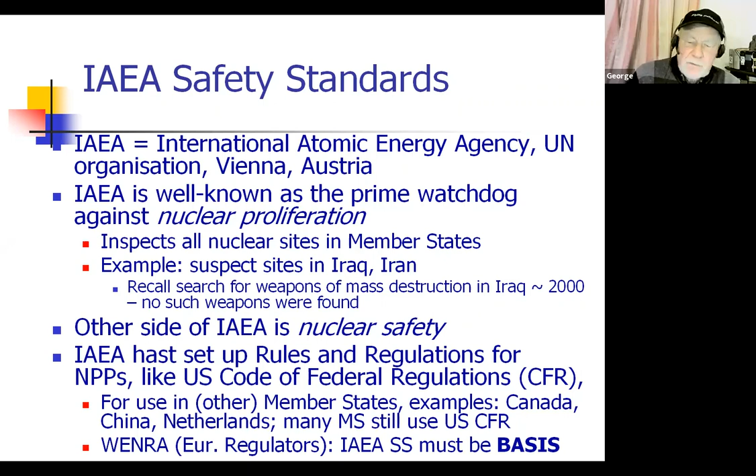I'll talk a bit on the structure of the rules and regulations. They are comparable to the US regulations, in that they have first general safety requirements, with 7 parts. I'll just mention a few of them. Part 1 is government organization - that means, notably for countries embarking on nuclear power, it is relevant for them to know what type of organization they need for a proper structure to build nuclear power plants.

Part 4 is the safety assessment - how do you assess the safety of the proposal by the applicant? And Part 7, also important, is the response to emergencies. So those are the general safety requirements.

Then there is a number of specific safety requirements, and there I would focus on two very important ones. SSR-2/1 is the design of nuclear power plants, and SSR-2/2 is the operation of nuclear power plants. So the design of NPPs can be a little bit compared to 10 CFR 50, Appendix A, which has the US design features, design requirements for NPPs.

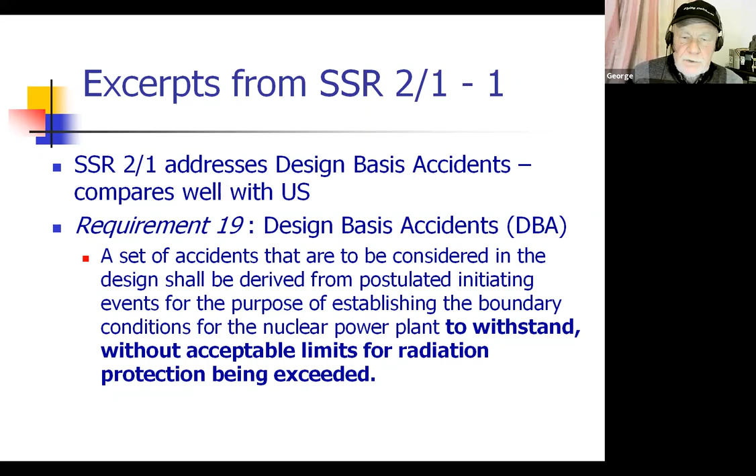Then that is different for the design extension conditions. The agency there has added on the design basis event. They have defined beyond design basis events, which they call design extension conditions. And there, that is in requirement 20, then they say that you should consider a number of conditions beyond the design basis with the purpose to improve further the safety of nuclear power plants. And in doing so, try to enhance the plant's capability to withstand without unacceptable radiological consequences, accidents that are more severe than design basis accidents.

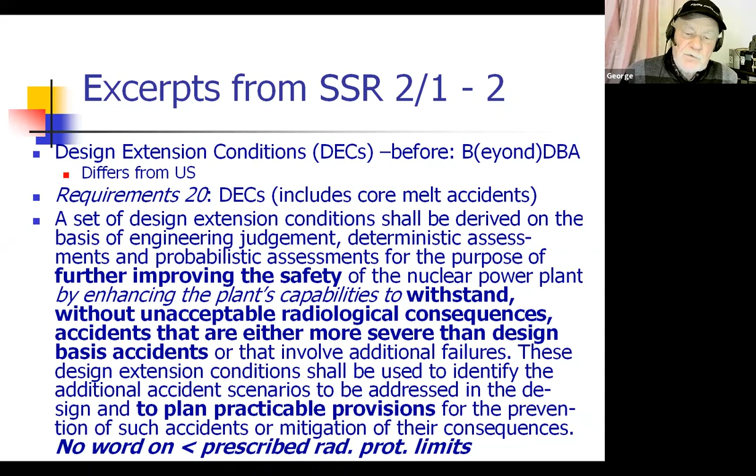And you must use these considerations to plan practicable provisions for the prevention of such accidents and mitigation of their consequences. So there is no word that you must stay below certain radiation protection limits. You see here, you must make practical provisions for the prevention of such accidents. In practice, the agency requires the new nuclear power plants to make strong use of this requirement 20 that they have, let us say, outside radiation practically eliminated. That is the goal. So we practically will not see any dangerous consequence outside the nuclear power plants.

So these design extension conditions must be considered in the design. It is not a voluntary effort. You must do so. In the US, you have this 10 CFR 52 that also gives you how to license a new power plant. And there is a few lines also that you should describe the matters which are there to prevent and mitigate severe accidents. But I found only these 2 lines, not anything more.

And nothing is said about that you should try to stay below or not have unacceptable radiation limits outside. The applicable regulation here is more soft than for the design basis events. For instance, for the design basis events, we have a safety classification, which is very strict. Because if you define a certain system to be safety class 1, 2, or 3, or as it is today in the US, safety related, then that gives additional high-level requirements for the manufacturing of the components of that system.

For the design extension condition, if you have equipment used to prevent or mitigate those events, then they lower that safety classification, and they are satisfied with industrial quality. You can say for the more probable accidents, they require a very high level of defense. And for the very low probability events, it is satisfactory if you have an industrial quality. It must still work, of course, but you don't need to spend a lot of money on high safety classes of the dedicated equipment. Also, there is no single failure required.

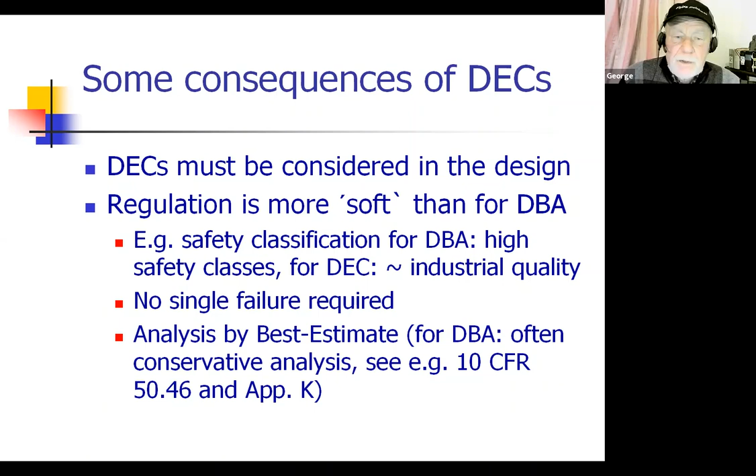The phenomena during a core melt, if you are not well known with them, I will list them briefly. First, we have extreme hydrogen generation by the water-zirconium reaction. I hope you at University of Wisconsin have success with your research on accident-tolerant fuel, because that would make this hydrogen generation more mild. The core will melt by its decay heat, resulting in an immense release of fission products to the containment.

That core may ultimately melt through the RPV lower head. If that occurs at high pressure, you are pushing extremely hot debris around in the containment, and that may give you pressure spikes known as direct containment heating, which may threaten containment integrity.

If after the melt-through of the RPV the corium is falling down into a water pool, you may have a steam explosion in the cavity, or in the pedestal for a BWR, and that may breach the cavity or breach the containment.

The molten core will also interact with the concrete, ablating it, and generating large masses of carbon monoxide and carbon dioxide, which results in pressure spikes in the containment. This is known as MCCI, the molten core concrete interaction.

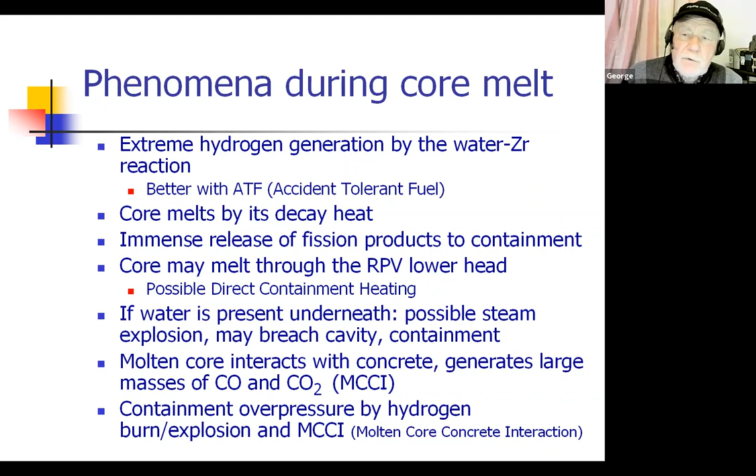Here I give you a short overview. Here you have the vessel with the core melting, and here it falls down into an eventual water pool, possibly generating a steam explosion. The hydrogen combustion puts a lot of pressure in the containment. We have direct containment heating, when the vessel contents are pushed into the containment atmosphere. So there is a lot of bad things that can happen.

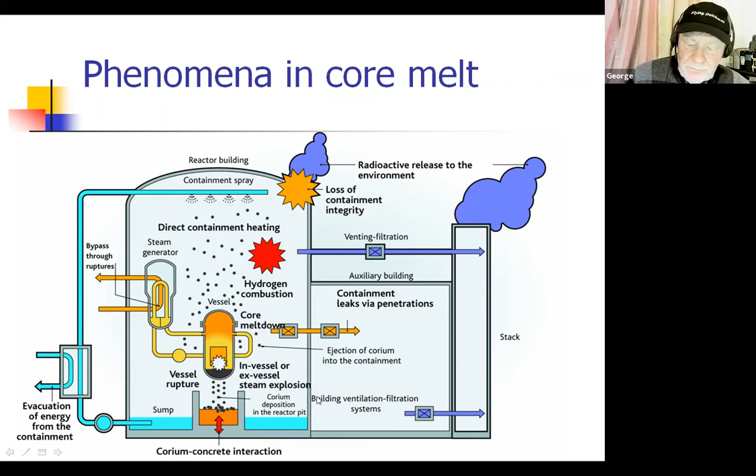Here you see a few details of those processes. Here is the steam explosion in the cavity of a French PWR, from a French monograph. The red sign is clear to me, but I must say I didn't notice what the yellow means - I guess it's related to the steam explosion. This steam explosion can destroy the cavity, and even more of the structure, and eventually the vessel may come down, or you may even overpressurize the containment itself.

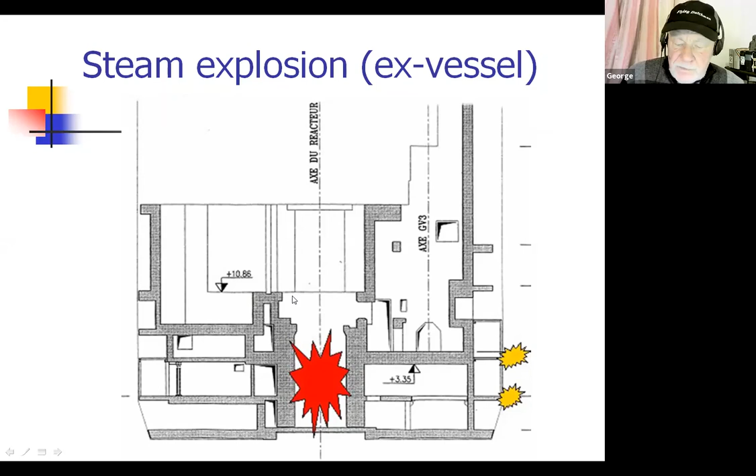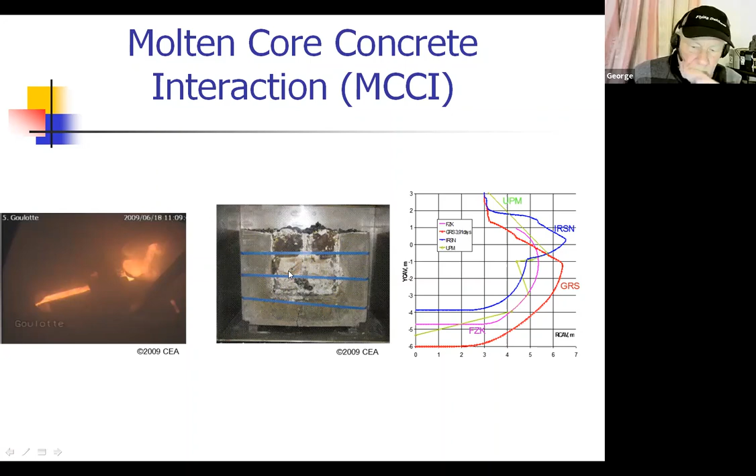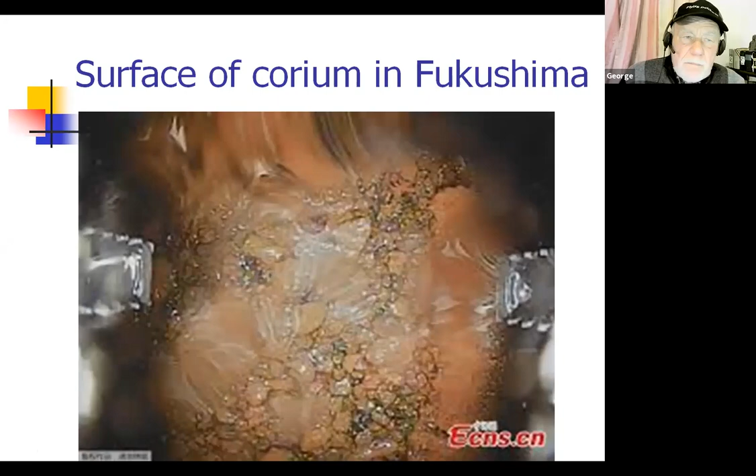The consequences of the design extension conditions - I will focus on what we did in Europe. The design extension conditions remain clearly beyond DBA. Nobody tried to have the design extension condition inside the design basis.

Some countries have established radioactive release limits - for instance Sweden and Finland - saying you may not release more than so much radiation in such a scenario. Personally, I would say it may not be feasible to have such strict rules, because severe accident calculation is a tricky business with large associated uncertainty. So if you do the calculation there will be a big margin, and it's difficult to demonstrate you stay below certain limits. But differently from the US, many countries here have required hardware features and hardware changes.

I'll give you some pictures in the next slides. First, there were filtered vented containments - that means if the containment is overpressurized, it's not just relieved to the atmosphere, it's relieved through a filter. There are also hydrogen recombiners installed.

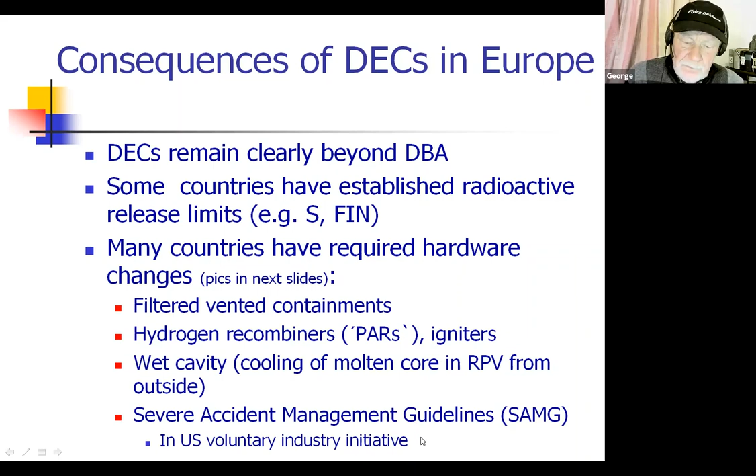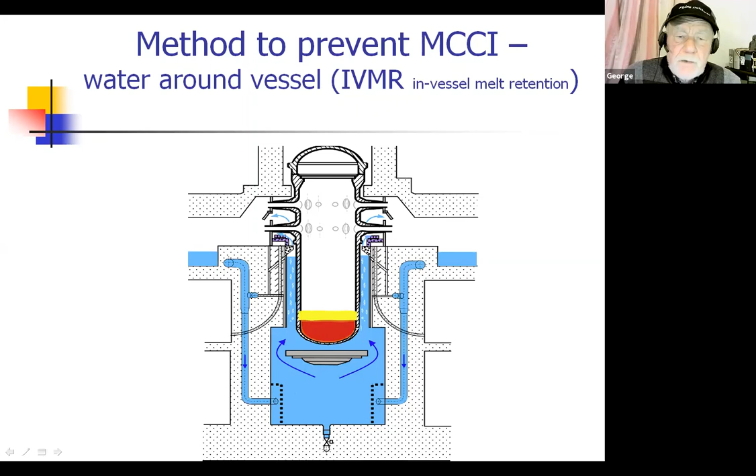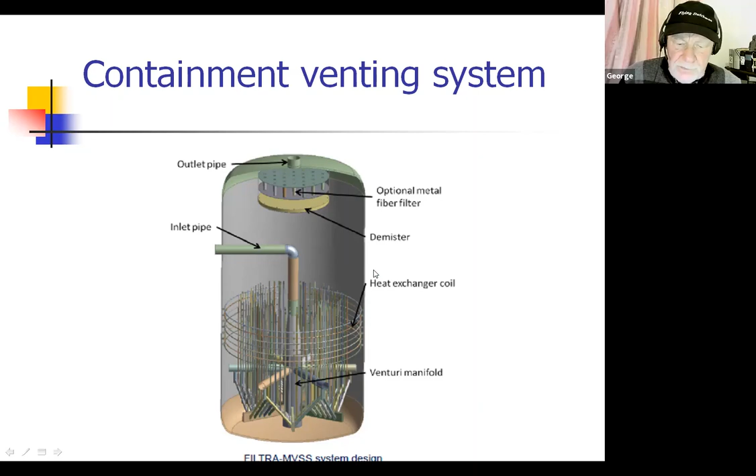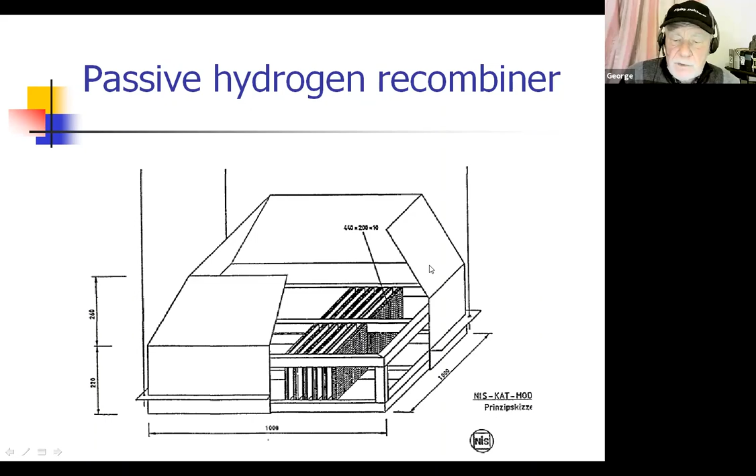The accident management, how does that look? You will recall there are probably 3 ranges of procedures. First, for normal incidents, the abnormal operating procedures, the AOPs. Then if we have safety injection or an emergency shutdown, we have emergency operating procedures after that. If we cannot save the core using these two sets of procedures, we understand we have a damaged core, and that brings us to the severe accident management guidelines.

Please note the difference: for the first 2 conditions, we have procedures, which means you must follow them verbatim. For the core damage accidents, we have guidance, and there is no need to follow them verbatim. The US completed this severe accident management guidance already in 1998. In the rest of the world, that started later, and unfortunately not all plants may have that yet. In 2011, Fukushima, for instance, did not have a complete set of operational SAMG available, which otherwise might have helped them quite a bit.

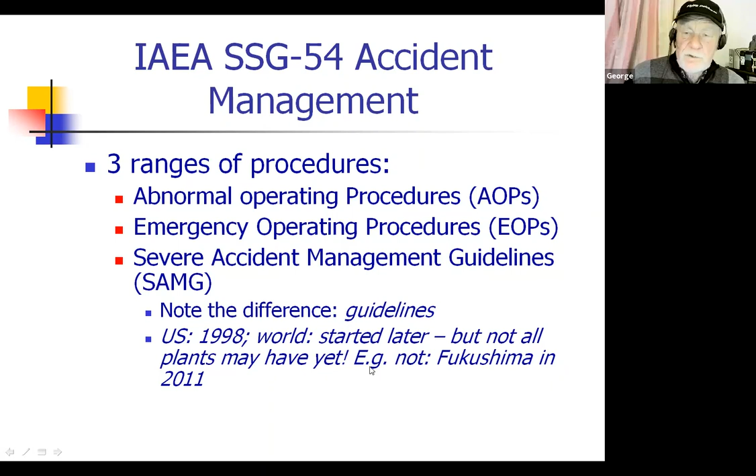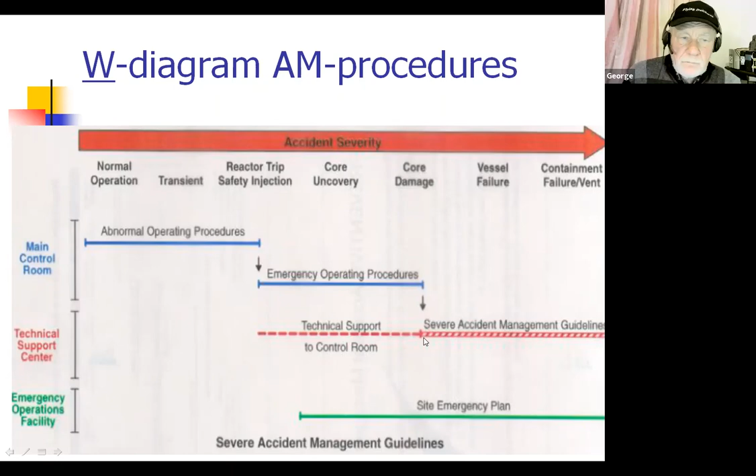Well, what about the lessons from Fukushima?

Here I borrow from a lecture by Yasunori Yamanaka from CRIEPI, which is something like EPRI in Japan. For accident management, he says the very first thing you must have is comprehensive data collection. Evaluation of data is essential.

I'll give you examples of how this can go wrong. There must be a smooth linking between the permanent equipment and the mobile equipment. Somewhere your permanent equipment will fail, otherwise you wouldn't be in that accident. You must hook on the mobile equipment, but you don't have much time to do that. Once the permanent equipment stops, you have not much time to switch on the mobile equipment. This happened in Fukushima, but unfortunately maybe in other plants as well - hooking on mobile equipment within a certain time must be exercised and trained, because a lot of things can go wrong.

I myself saw once an exercise in the Netherlands where they tried hooking on portable equipment, and I insisted that they should do the test. The people said, George, that is not needed, we know there's a big hose and it will connect there. But I insisted, and when they were unrolling the big hose, they found out the hose was one meter short. It didn't reach the proper interface equipment.

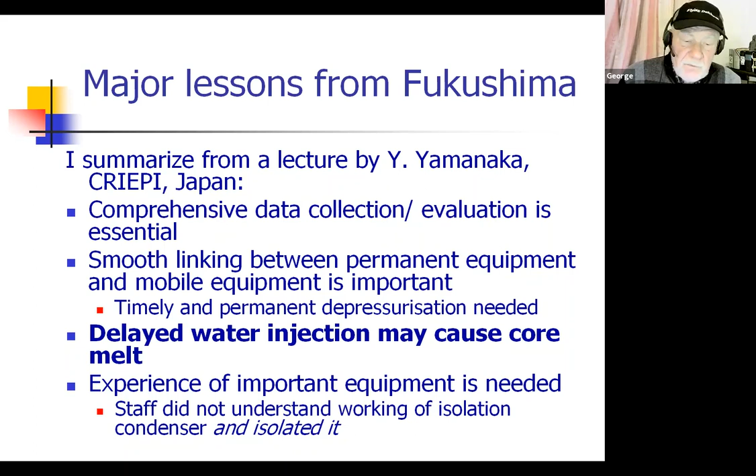Here you see the difference between actual and observed data - the observed water level in the reactor pressure vessel of Unit 1, where this is the top of active fuel and here below is the bottom of active fuel. This is what was seen in the control room. But when they finally analyzed the whole thing based on the data, the analysis gives somewhere in these two curves - meaning the measured data were totally and fully off from reality.

That is one of the important things in severe accident management guidance - you must have instruments that tell you the truth, or if they don't, that you know what the deviation is. Some SAMGs do tell the people that this or that instrument will give so many percent difference in reading, but a number of them only say you may see a different reading, don't trust it. That, of course, doesn't help the operator so much.

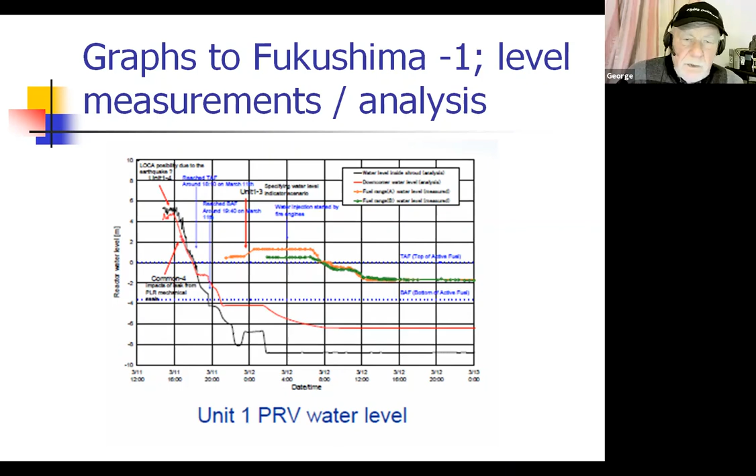Here is the most typical process in Unit 2, where they were injecting with the mobile pump, and by injecting water they ran above the pressure of the injection system. So injection was stopped, and when pressure went down again, it came up again, and injection resumed. A large amount of steam and hydrogen was generated, causing immense heat in the degraded core, and it is believed this enhanced the core melting - so the fuel melted as a consequence of water injection.

That is the thing I believe operators must know - the moment they understand the core is gone, they should have guidance on what to do: either put so much water that you immediately quench it, or don't put water in the core and wait until it melts through the bottom, then take your measures there. These are the things that must be evaluated by the technical support center and then lead to a conclusion.

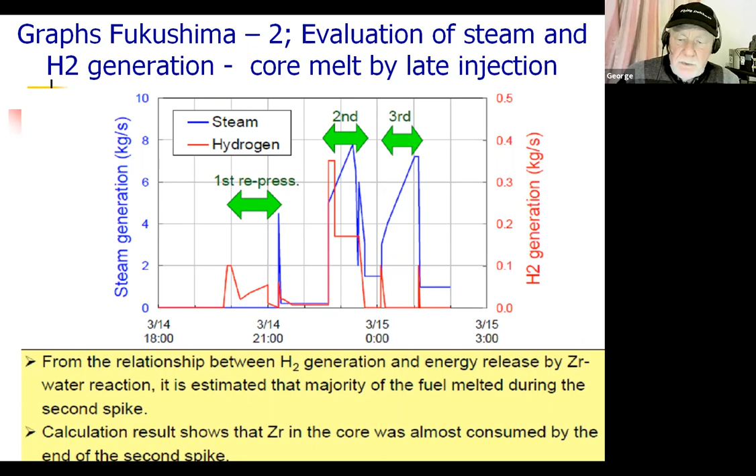So, some fundamentals of severe accident management. Before, I said it is so different from EOPs. Well, the EOPs tell you how to protect the reactor. So they give you all types of means to make sure that the reactor will not be overheated, that you keep it cool, and that you keep it shut down.

Now the core is lost. It doesn't mean you must stop your exercise there, but your attention should shift from the core to the fission product barriers. Your first and prime attention must be the integrity of the remaining intact fission product barriers, because the SAMG is not to protect the core, but to protect people. Just that, something totally different.

Another thing very typical for severe accident management guidance is that some actions may have very severe negative consequences. Usually the actions in EOPs are beneficial. If you do them, they have success. But here, they may have very bad consequences.

An example is containment spray, which is very useful in the EOP domain. But if you also have hydrogen there, and a lot of steam, the spray will take away the steam and may invoke a hydrogen burn, and you may lose your containment right on the spot.

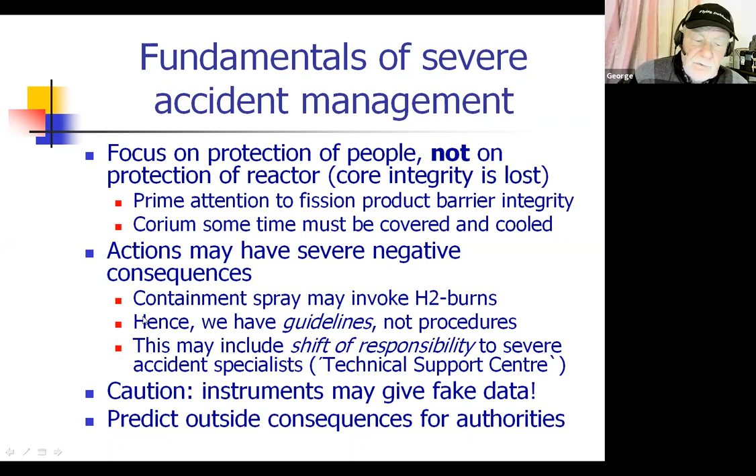The thought process of SAMG is totally different, as you will have understood, from the EOP. I will give you an example of this different thought process.

You will recall the Titanic hit an iceberg in 1912 and went down, although it was believed the ship was unsinkable because it had these watertight compartments, 15 or so of them. The ship was designed so it would stay afloat with 4 of these compartments flooded. If you flooded 5 compartments, it would go down.

Now, what happened when the captain discovered there was an iceberg ahead? He did his usual maneuver, that is, move out. He went left or right, I'm not sure what he did in reality. But he tried to avoid the iceberg, and because he was too near, he was unable to really avoid it. So he hit the ship on the side and opened up 5 of the compartments.

So that meant the ship was lost. They understood already long before the ship actually went down that she would founder. What should the captain have done? He should not have tried to avoid the iceberg, but should have hit it head on. In that case, he might have damaged the first compartment, maybe also the second, but it would probably have been limited to those 2 compartments, and the ship would have stayed afloat.

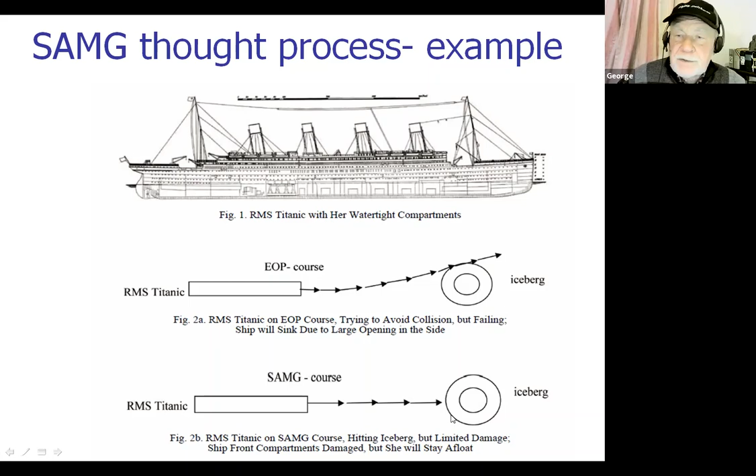So the thought process in SAMG is different. When I did various reviews of SAMG, I observed that most people treated the SAMG as EOP. They didn't change their thought process. And you must do that. If you are unable to do that, if you are unable to move out of the old mindset, you will be a Titanic and will founder.

I will give a few last words on what I consider relevant items for future safety research. I was invited to write an article on future safety research on the long term, for the upcoming decades, by Professor D'Auria of Pisa University in Italy. I did so, and it will be published in Nuclear Engineering and Design in a couple of months from now. The article is about 30 pages long, so you have some reading there.

One of the things I observed is that we should better understand the scaling laws, because a number of insights into reactor behavior, into the physics of core damage and core melt processes, are obtained from laboratory scale experiments. Then computer codes are designed that take all these effects into account, so they can hopefully predict what will happen in a reactor case.

But here, my friends, one should be extremely careful, because what you have measured at small scale may not be the same as what you would see in a real event. So you must also investigate the scaling laws. Unfortunately, this is something I saw addressed only very few times — people more or less extrapolate their findings from laboratory research into the reactor case, one-to-one. That, I believe, is something that absolutely should be resolved.

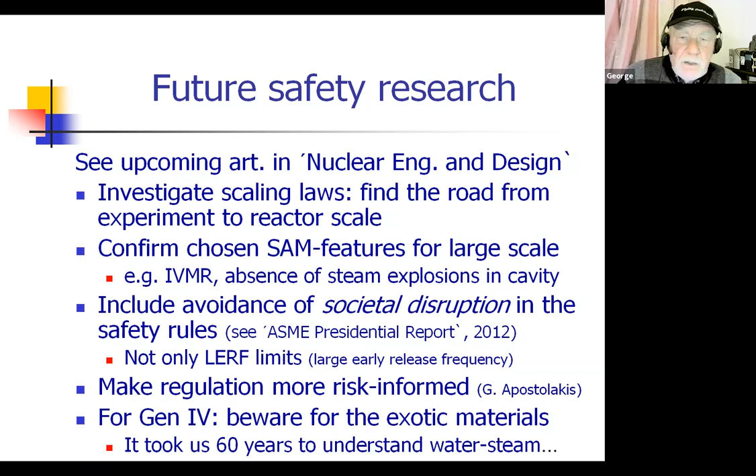Okay, that brings me to my last slide, which is very short. If there are any questions or comments, I will be pleased to hear them. Thank you for listening to me.

Thank you, George. It's a very impressive presentation. So any questions from the audience?

You may also send me an email, of course, if you believe the question is more complex or otherwise. Yeah, thanks, that sounds good. Yeah, I have a quick question for you, George.

In this work, you talk about a lot of efforts on severe accident research for light water reactors under the structure of IAEA. I'm wondering if IAEA is making any efforts on severe accident research for advanced reactors, or maybe micro reactors, small modular reactors, things like that.

I'm not sure I understood your question. The IAEA has a limited research program. They more or less rely on the expertise of research done in national laboratories. They have some limited coordinated research programs, that is true, but it is not really a creation of knowledge on this type of work. So they assemble information that is around, and they produce reports.